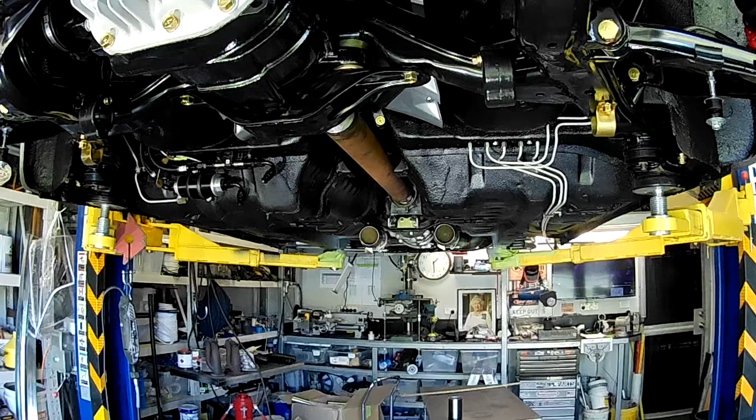So as promised, folks, following up after last week's video on building the dump pipes, we're now about to start building the exhaust system, or at least part of it. So as you can see, the cats are sitting in there at the moment, and what I'm doing is I've just sort of been planning out the available space that I have where I'm going to run the exhaust system.

You can see that I've got the rusty old tail shaft sitting up in there, which is actually a custom made one-piece tail shaft for this thing, but it was never painted when the car was built originally, so it just looks like a rusty old piece of pipe. I don't want to paint it until it's going in for its final fit up, so excuse the rusty looking old tail shaft. So let's head over to the bench. I've just drawn a bit of a layout of what I've got, and I'll explain to you what I'm about to do.

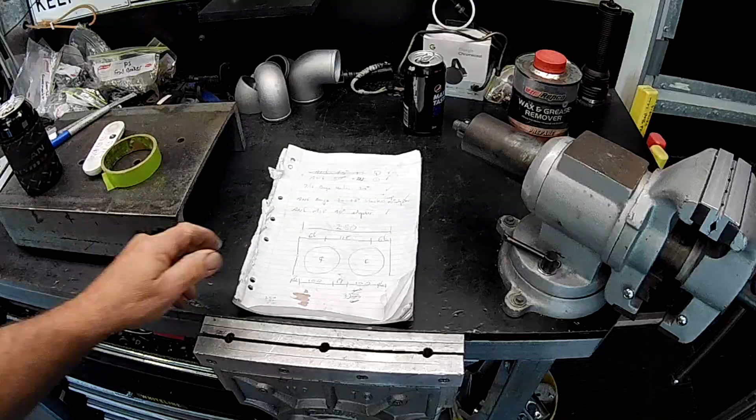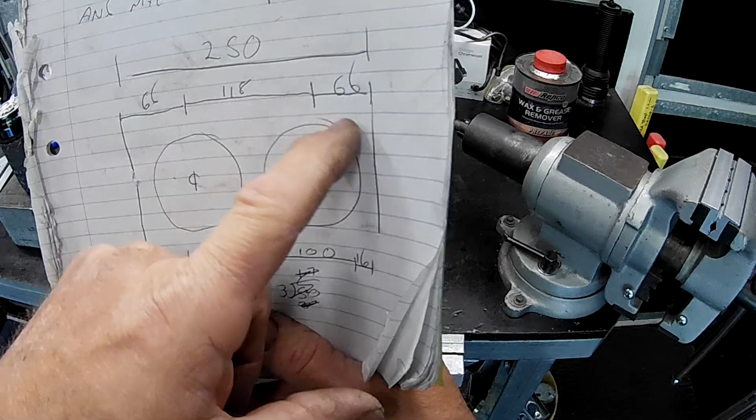Alrighty, so I've been drawing up a bit of stuff, and no, I haven't just been sitting around drawing boobs, guys. This is the overall size between the transmission tunnel here, which is 250mm. So what I've done, I've got 100mm circles in there. They represent the outside of the resonators that I'll be running through that section. So it's going to be a 3-inch pipe, you know, like a 3-inch resonator with a 4-inch body.

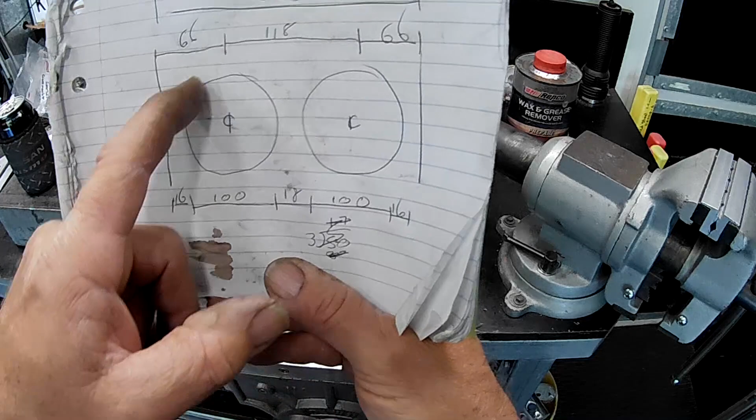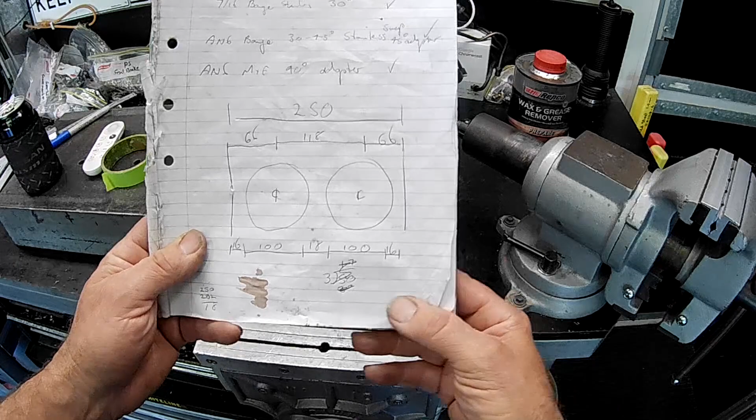And I'm going to fit the biggest, longest resonators that I can in there, because, you know, I hate drone, and it's always a good thing just to fit the biggest resonators that you can. For me personally, a lot of people might not like it, but I do. So you can see I've just mapped out the sizes. I've worked out the center lines of the pipes, the distance that they will be on the side, clearance through the center, and all that sort of thing. So that's my layout that I've got to work with.

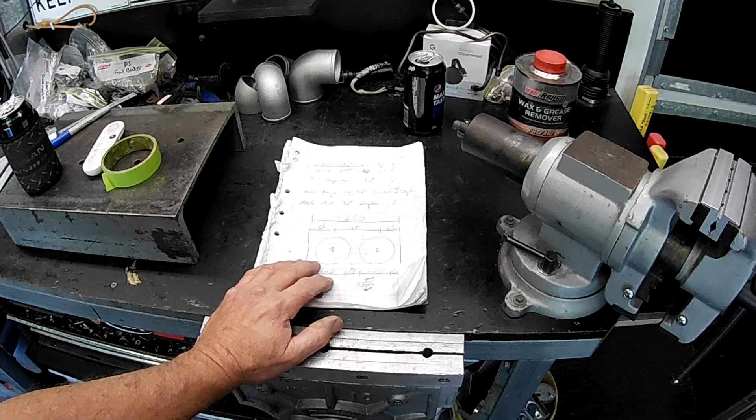So now after doing that, what I really need to do now is build an X pipe. Now, I've built X pipes before on my YouTube channel. I will put a link right there to a more in-depth X pipe build where I go into explaining a bit more of the sort of theory behind it. But for now, let's head over to the bandsaw, and I'll just whiz you over what I'm about to do and how I'm about to start knocking out this X pipe.

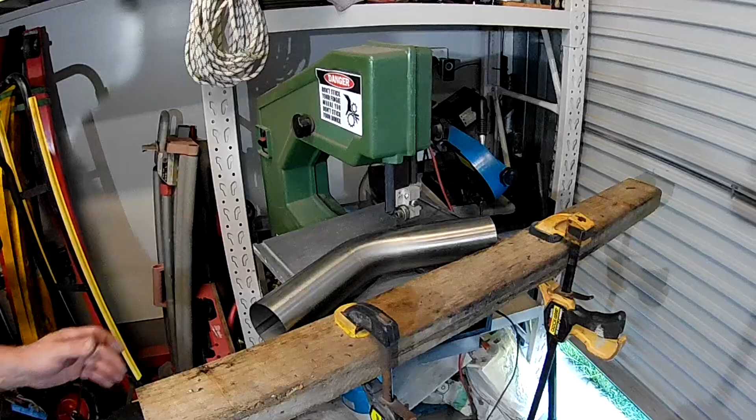So what I've got here, folks, is a 45-degree mandrel bend. And you can see this line that I've got drawn on there. What I'm going to do is I'm going to cut that off on my bandsaw here. So you can see that I've got a fence set up along the side of the bandsaw there, just so that I get a nice straight even cut. And I've put a bimetal blade in my bandsaw here.

And I've talked about my bandsaw before. This is just a real el cheapo home hobby bandsaw that I've modified. It has a treadmill motor on it with variable speed, and I made this head for it so it runs proper bearings and stuff. So it cost almost nothing to build. The bandsaw unit itself, I think I paid 20 or 30 bucks for it because it came without the head.

So what I'm getting at, folks, is that you can set your workshops up at home for very little money if you're on a budget, without really needing to invest mega bucks, particularly if you're starting out doing a bit of your own fabrication on your own vehicles and stuff like that. And honestly, I've got no need to spend more money on something like this that I use here at home. Obviously, if I was back in the shop doing more fabrication, I'd have more of a professional unit.

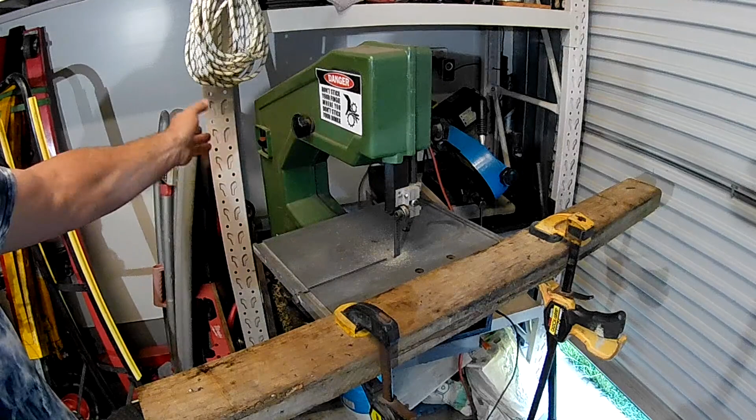But this is compact, and as you'd be aware, there's not a huge amount of space in the Aussie shed, so it's mounted on like a 4-wheel drive pull-out fridge tray, so all these tools just slide back into the shelving when I'm finished using them, just to try and maximise the space here in the shed.

So yeah, with X pipes, a lot of people use the 1/3 rule. They go 1/3 the diameter of the pipe and sort of come in. I tend to go a little bit less, just because 1/3 tends to almost line the pipes up in the X. So I think I've gone about 15mm here, just off the side, and you'd be surprised how big a hole 15mm parallel off that edge will make in the piece, and how crossed over everything will be just with that small amount.

So I'll get the bandsaw running, guys, and I'll just chop through this, and I'll do another one off camera, and we'll put them together, and I'll give you a bit of a look at them, eh? So sit back and enjoy a bit of bandsaw fun.

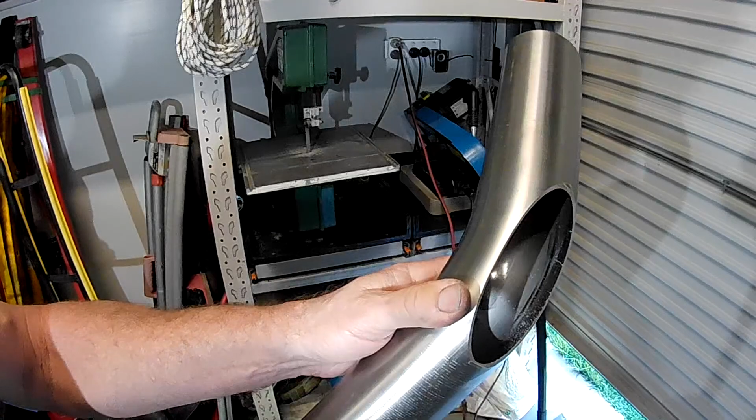So there we go, folks, that's what it looks like. As I mentioned, you can see that's from taking 15mm off the width of the pipe, and it does make quite a big hole. And this is one that I did earlier. So this is straight off the bandsaw too. I'm yet to clean these up.

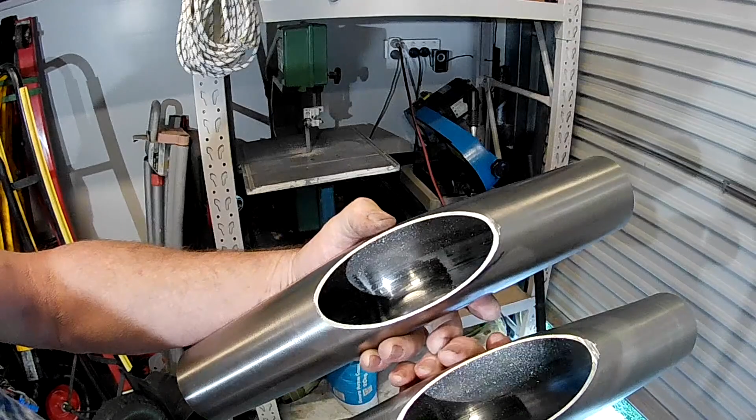When I'm finished, I'll run these on the belt sander and properly flatten them off before I go weld them together. But you can see you could basically just weld them up as they are. It's a pretty neat sort of a fit. So what you end up with there is where the pipes line up with each other, you get about half a pipe coverage sort of thing. So the side of this pipe lines up with the center line of the opposing side of the X.

For me, that seems to be a really good sort of a solution and gives quite a nice distinctive sort of a sound. And yeah, so next thing to do, folks, like I say, clean it up on the belt sander. Then we'll tack it together and weld her up. So let's throw it on the belt sander, eh?

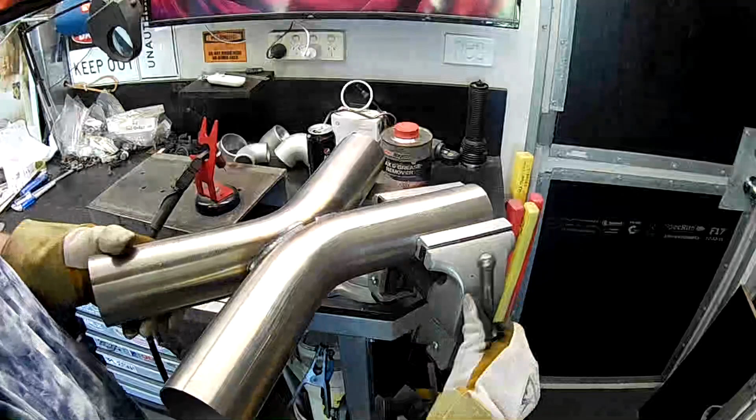And there's our X-pipe, folks. Turned out pretty reasonable. Pretty happy with that. Not bad for a roughie. So, what we have to do now, particularly on the back side of the pipe, we've now got to return back to straight. Because we have an angle here of 45 degrees and an angle here of 45, which gives us an effective angle here of 22.5 degrees.

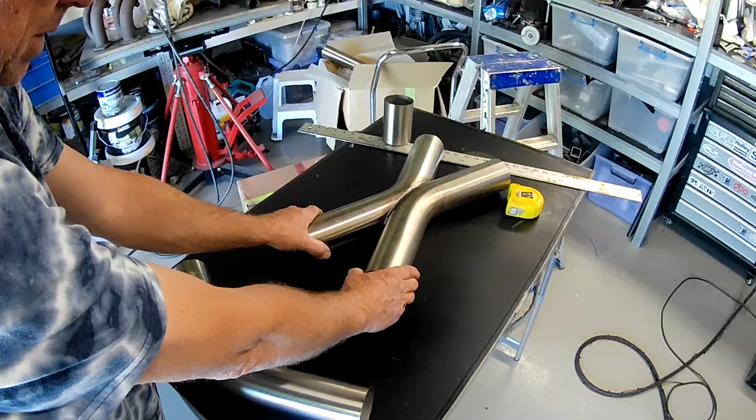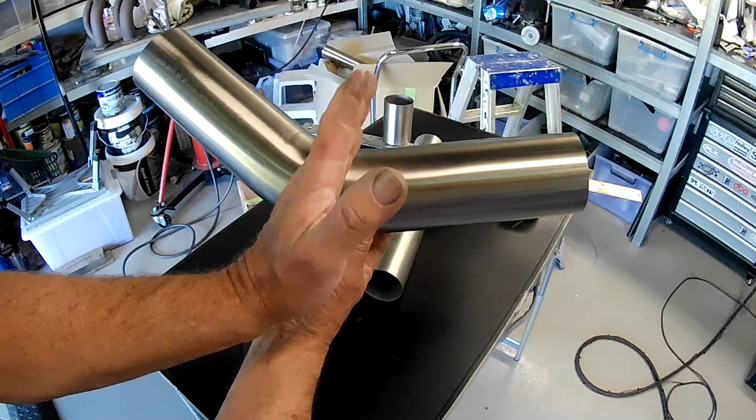So to return straight, we need an angle of 22.5 degrees welded onto this. So what we'll do now, I'll get another 45 and I'll cut it straight down the middle. That'll give me two pieces with an angle of 22.5 right in the center, which will then go onto here, and then we'll end up perfectly straight again.

But what we have to do as well, once we get those angles, we then have to work out our center line, which I think was about 118 millimeters. So I reckon we're going to be probably only 20 mil away from where those two pipes are welded together with our turned in pieces, and then we have to go straight again.

So we'll get this cut, and then we can lay it over the top of the X pipe, measure it, and work out how far back we have to cut it to get our straight pipes to the right width to fit in the transmission tunnel as we come back. So I'll go and cut this, and I'll be back.

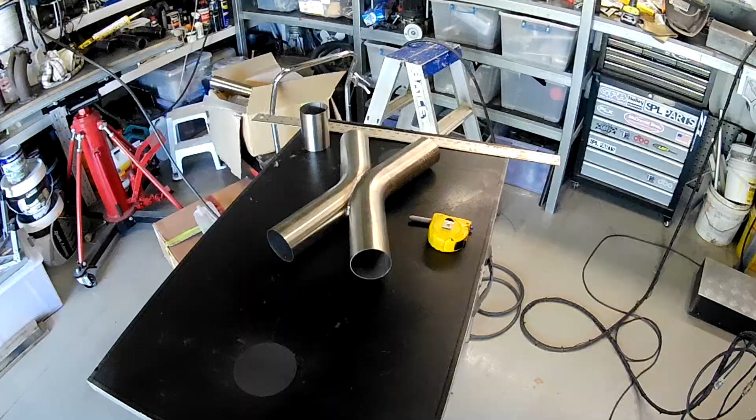So hands up if you're ready for the magic, folks. So here's our 45, and that ain't the magic. The magic's coming. Dun dun dun! Look at that. Oh, stay there. You're spoiling me magic trick.

But you get the idea, folks. If you work with known angles and you're able to split angles and all that sort of stuff, you won't get lost, and that can be the big problem when you're doing pipe work, is getting lost with all your angles. You know, you always come back from that, but it's just a time consuming process.

Whereas if you can stay focused on all your angles, if you're trying to negotiate your way around something where you have a little bit of space to play with, obviously in really tight areas you're kind of just stuck with cutting whatever angle you can get away with to make the bend. But in places where you're just kind of working something through, this is what you can do, folks.

And as you can see, looking at that, we've got an X pipe that leads into two straight pipes that's going to come down through the transmission tunnel at the back and go into our resonators and all that sort of stuff. So all we need to do now, folks, to get our width across here that we've got on our piece of paper that I showed you before, is to just move further up the X pipe. The further we move up, the narrower the pipes get together.

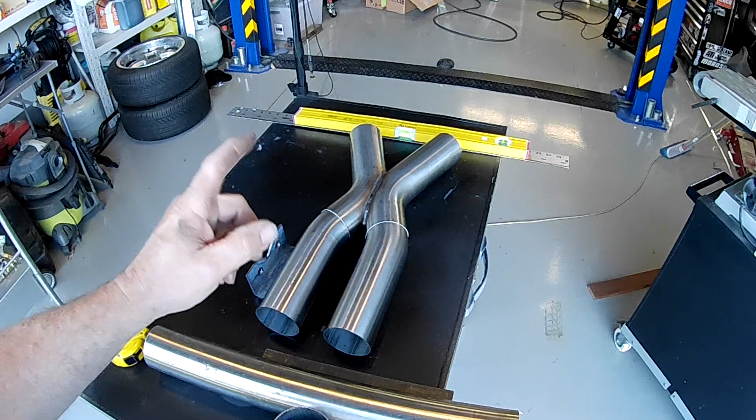Alrighty. So I will just work that out, cut them off, and I'll bring you back. And that appears to be about what we need, folks, right there. Works with the measurement, everything's fantastic. I'll get it back to the bench, I'll tack it together, weld it up, give you another look at it.

There it is, folks, all welded up now, looking quite reasonable. So this piece is probably 2/3 of the way completed. Obviously these straight sections are now going to have to be cut to length where they join onto the resonators. Once I get the resonators and work out how much room I need, I will probably trim these back.

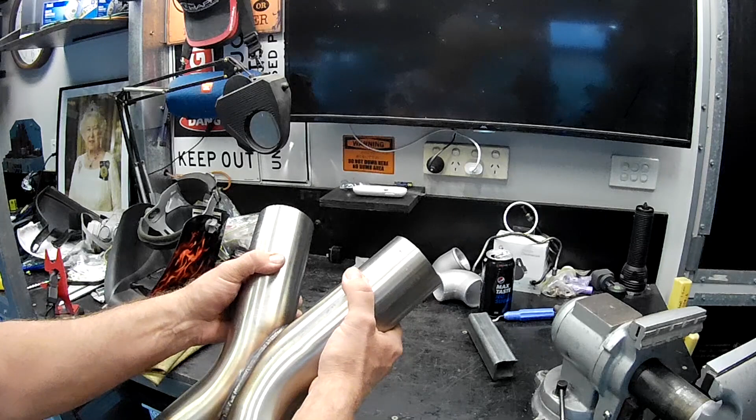And then this end up here has got to work its way into the catalytic converters via a flex join. So there'll be some bends, and there's also a bit of a height change where we come out of the back of the gearbox. We've got to step up a little bit to get the clearance that we need underneath the car. So of course every bit of progress is progress. So let's get into those things, eh?

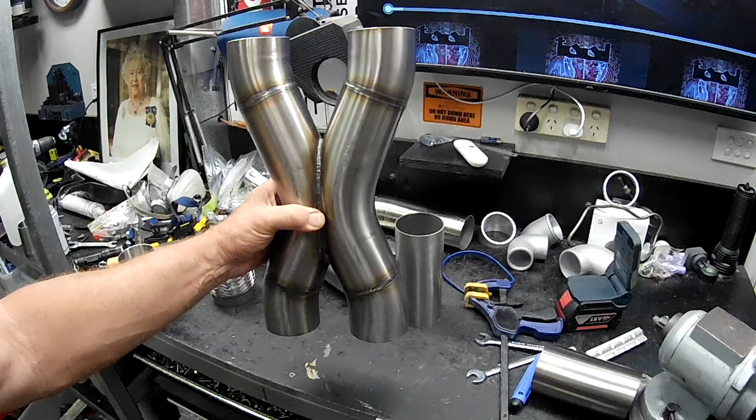So we're all trimmed off to length now, folks. It's looking pretty good, and I have some other components here, and I'm about to continue on with this and start building the midsection of the exhaust system. I've got the resonators in a box next to the bench. I'll drag the resonators out and I'll show you how this is going to start going together.

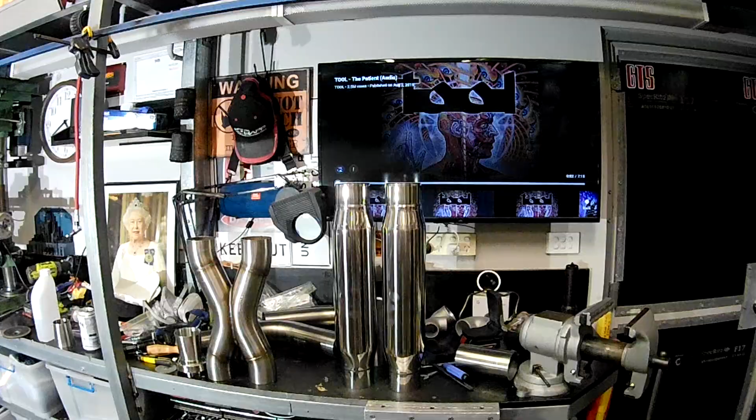Sorry folks, I just had to frig around with the lighting a bit. These are pretty tall, and my light over the workbench there was kind of shining into the camera and it was just creating all sorts of problems.

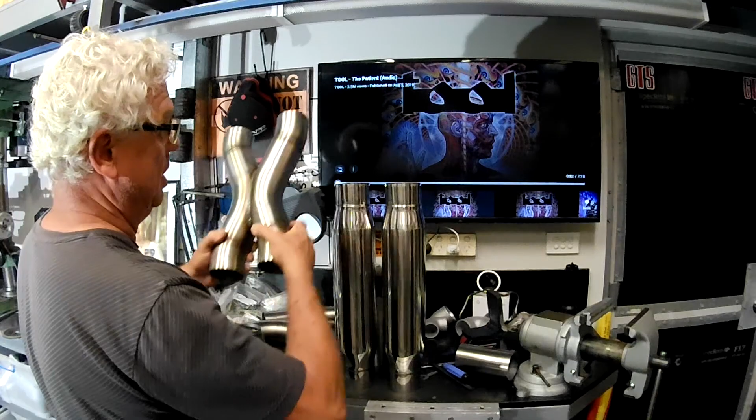But they're the resonators. And where are we? That's how we go up there. They've got a slip joint, flange joint sort of thing on them there. I'm actually going to cut that right back, so there's only about 5mm. So I don't really need all this excess with the way the joints are going together. And I'm also trying to keep the whole thing as compact as possible, because there's not a lot of length to the transmission tunnel area, and I've got a lot of stuff I want to squash in there. So trimming absolutely everything down as much as I can is what I'm having to do.

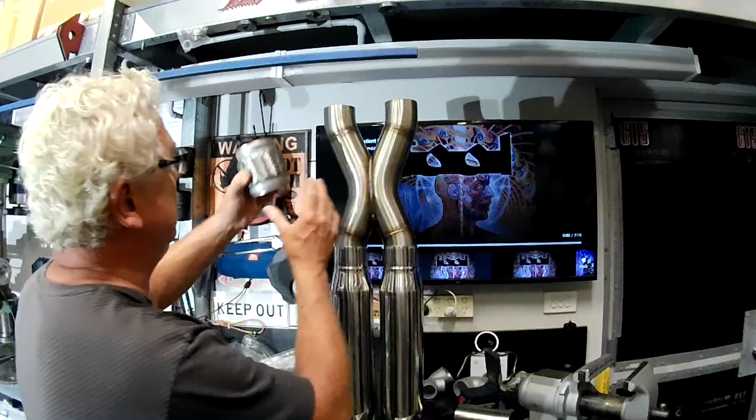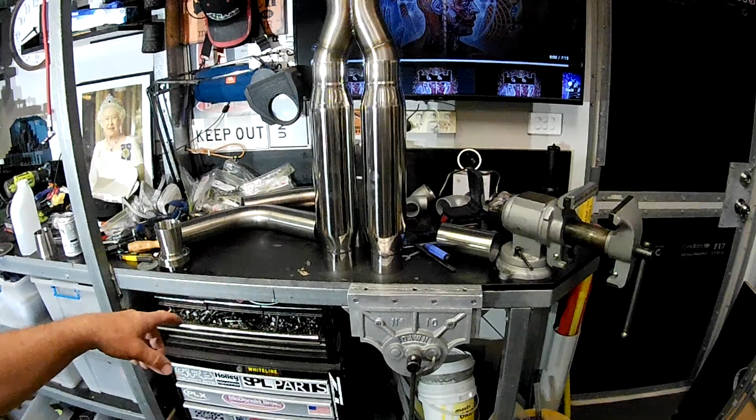I have flex joints for the top here too. They go on just behind the transmission cross member where it comes out of the cats and snakes around and up into these, just so there's a little bit of give in the exhaust system, so there's no chance of anything cracking or any issues with vibration that a flex joint can help take out. So obviously there'll be one of those on each side. And when we get to the bottom down here, you can see I've got some V-bands and some cones and stuff.

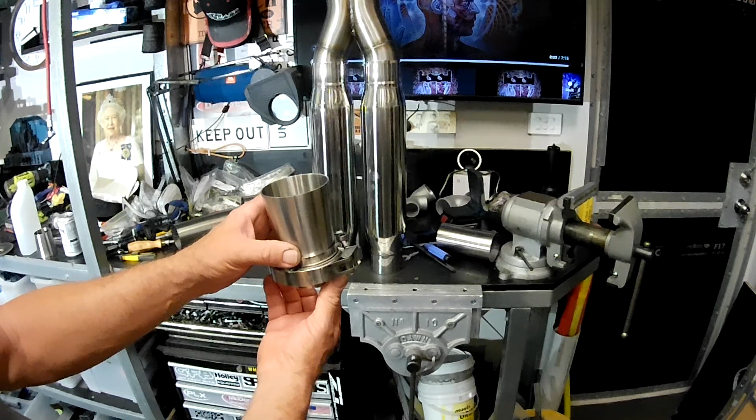So what I'm doing, once I get to the back of these resonators, I'm putting these cones on, which are 3" to 2.5", and I'm stepping down, and then I'm using a V-band, and then I'm dropping down to 2.5" tailpipes. So it'll be 3" system all the way back to the tailpipes. Tailpipes and mufflers are going to be 2.5".

So yeah, folks, it's come along quite well. I'm pretty happy with how it's all looking. So I've got these resonators cut down. I'll cut this slip joint off on both ends, again, so that I can keep it as compact as possible. And I'll TIG them onto these pipes, and we'll come back for another look, eh?

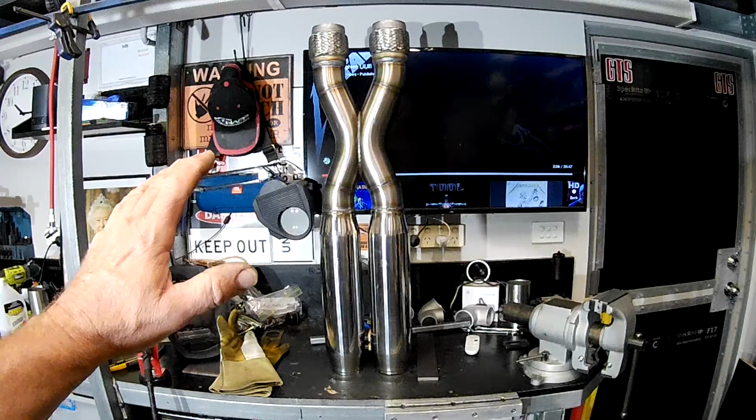And that's how it's shaping up so far, folks. So our X pipe is now becoming our mid pipe section. It's all looking rather nice. As you see, I've cut that extra flange material off the resonators. Got our flex joints welded on. This will actually encompass the cats as it progresses up, in the top area there. And the bottom, I think, will get a reducer and a V-band flange, possibly a bend as well before or after that point. But I'll carry on, folks.

I've got to do a little bit more work on the cats with the pipes that come back after the cats. There's a very slight corkscrew that comes from the back of the cats into this flex pipe up here that's going to take a little bit of work to get it just right. So I'll go and get stuck into that, folks. And again, I'll turn the camera back on when it's done, and we'll have a bit more of a look at that. And hopefully I might be able to put it into position for a bit of a glory shot. Alright, see you in a bit.

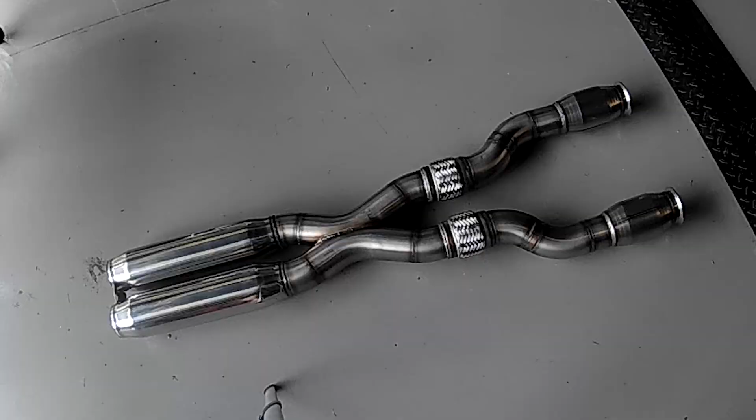Alrighty, I'm back, folks. And there it is. That's our mid-pipe section. Pretty much finished. So I might throw it on the car, and fingers crossed it'll fit. Okay.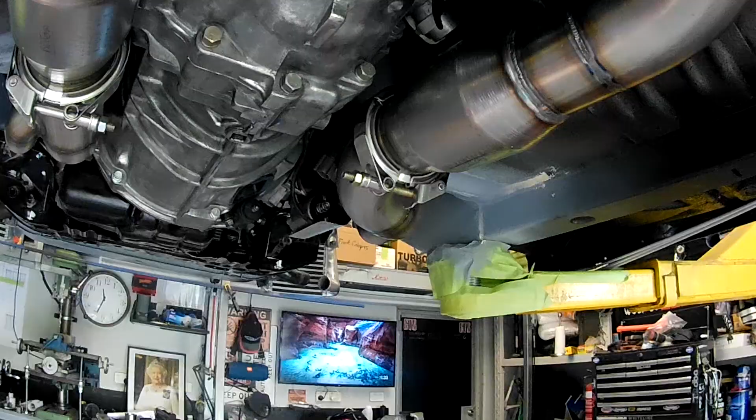So all in all, folks, I think that turned out pretty reasonable. I'll just give you a quick squiz at my quick release V-band clamps, and I'll show you why I love them so much. So quick release V-band clamps, folks, no gaskets. Obviously they have a locking nut. I've just got this bolt and nut in here just because I'm assembling and disassembling, and I didn't want to flog out the lock nut, because they do tend to get a bit sloppy over time.

So all you do with them is you just loosen them off, and then you can flip that off like that, and there you go. You can just basically pull it out then. No gaskets, just as easy to reassemble it. Squeeze it back together, put your clip on, do it up. Mate, you can't beat them in my opinion. It's been quite a while since I've used any sort of standard exhaust flanges and gaskets, just because in my opinion they're so inferior to the V-band flange. So there you go, today's hot tip from the Aussie shed, V-band flanges.

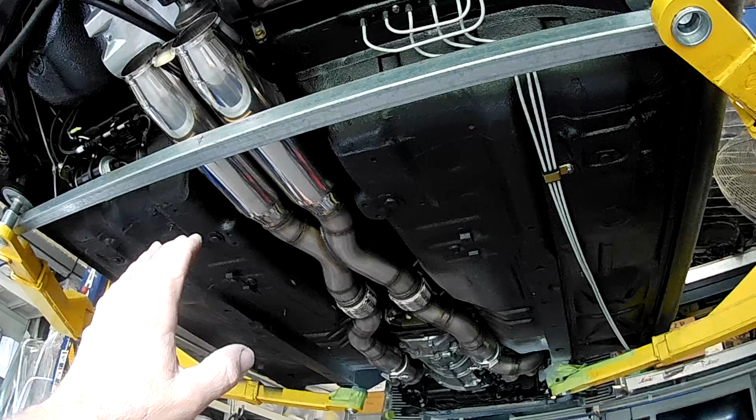So I'm a little bit unsure at this stage, folks, whether I'm going to continue on with the tailpipe and mufflers on the back of the exhaust system in next week's video, just because I don't have the mufflers that I'm after yet. I'm after a specific configuration of muffler, and I haven't been able to find exactly what I want at this stage, and I don't want to compromise by getting something I'm not going to be happy with. So the search continues. So possibly I'll be moving on to something else next week. Might be intercooler piping. Yeah, we'll see. So anyway, folks, I hope you like the mid-pipe build and how the whole exhaust system's going.